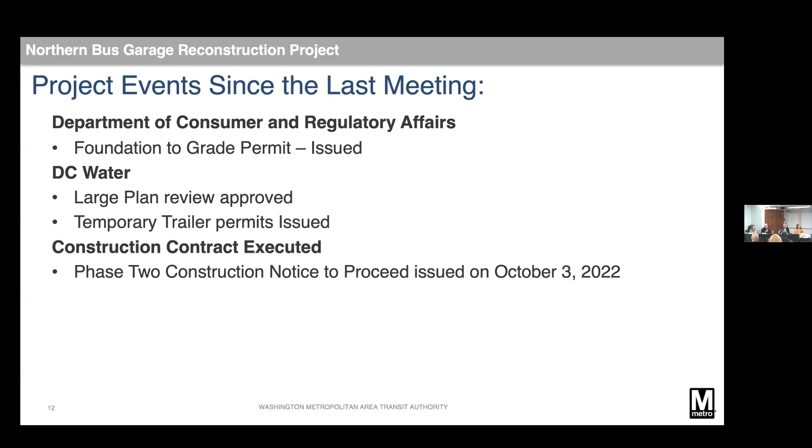Just to give folks a little peek behind the fence, in the third quarter, ahead of the full NTP, we did get an early enabling authorization as well. That allowed us to begin some of the remediation activities.

And then we also began the pre-construction survey program. I'll be diving into that a little bit deeper because I know there's some questions on that after this first construction update.

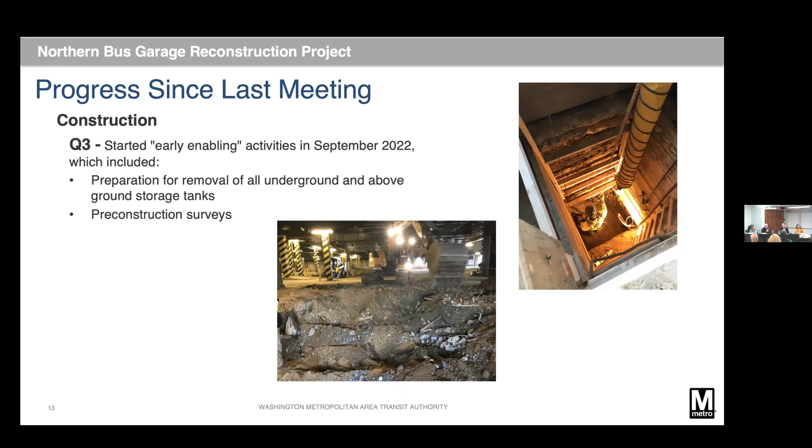The environmental remediation is a condition precedent to us initiating our major demolition activities under our raze permit. So the other things that have happened since then, right up through present day, is all of the underground storage tanks have been cleaned and certified.

6 of the 7 tanks have been physically removed from the ground. At this time, there is one additional one in the basement that we can't remove until we do some of the mass demolition. We have completed all of the purging of all of the lines that serve those tanks back to the dispensary points.

We've taken a lot of the bus maintenance equipment out. WMATA salvaged some of the parts for the vehicle lifts for other facilities for spares. And we have other equipment that we've been demobilizing.

All of the above ground storage tanks that were in the building have also been removed at this point. And the field work associated with the Department of Energy and Environment, DOEE, for the supplemental site assessment has been completed, and Jim will be presenting further information on that later this evening.

The couple of pictures you're seeing, again in the top right, is more of the work associated with the underground storage tank, and the large excavation in the bottom right-hand picture there.

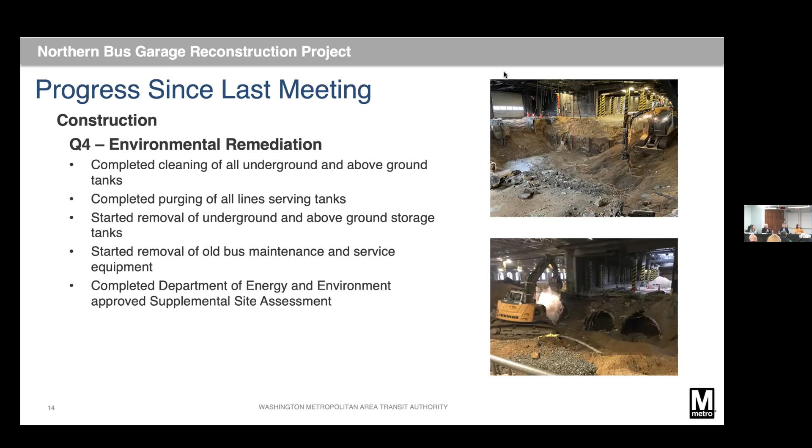The other major activity that's more forward-facing, because it's outside the building, is our mobilization - all of the maintenance of traffic around the site perimeter, the long-term construction fencing, and the art and graphic fabric wrap that you've seen.

The complex has been in the process of being set up and built out on Arkansas Avenue. Our temporary electric power interconnect with Pepco is underway. The water and sewer connections are moving forward through construction permitting, and we will have a soft move into the trailers next week with full occupancy the following week.

This will allow us to take the major step of fully disconnecting all utilities serving the existing building as we move in. The street tree removal permitted by urban forestry was completed, and we've been trying to get moved and set up and out of the building we've been working from so we can advance into demolition.

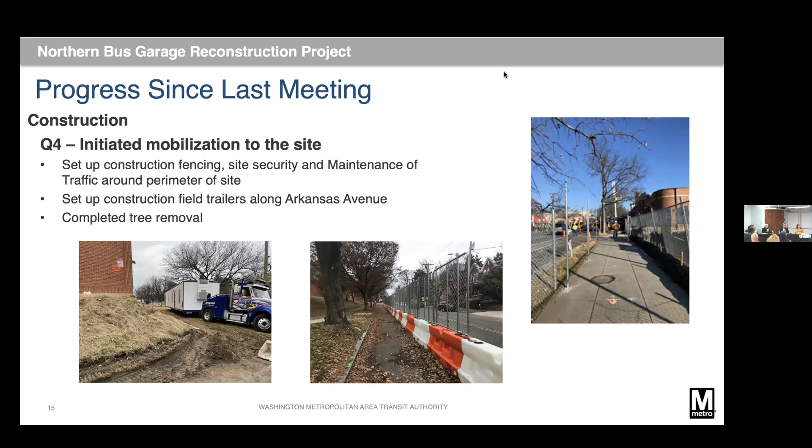As the fourth quarter wrapped up and we moved into January, we put in other instrumentation equipment, including noise and vibration monitoring. We're starting to put up some of the physical monitoring for prisms, and we're working on permitting for the devices we'll need as we initiate major excavation. We have some other monitoring devices that are part of that program.

The installation of foundations has been ongoing along 14th Street for the facade bracing system that will go up for the portions of the facade being preserved. We've also begun preparation for the start of major demolition, which actually began on Tuesday on the cover over Decatur Street, working down toward Iowa, then moving to the south side parking deck and working ourselves into the middle of the site.

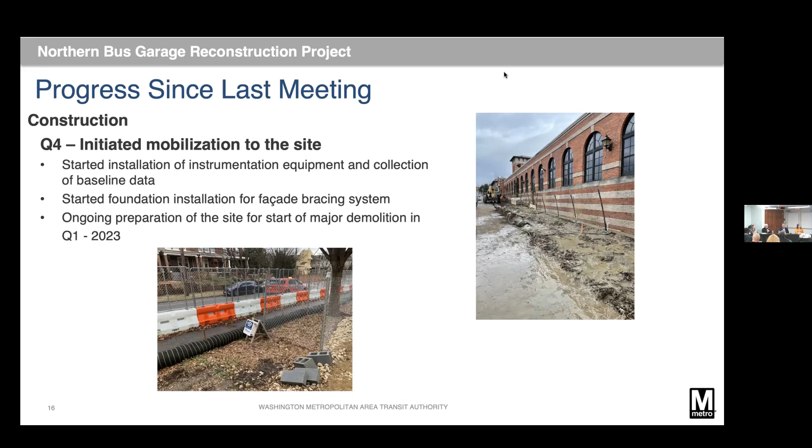As we move into this first quarter, the last of those underground tanks will come out. All remaining service equipment in the building will continue, and pre-construction surveys will continue as our neighbors ask for them. Instrumentation and baseline data will remain ongoing. The historic tower re-support - we're drilling the foundations for that inside, and we'll be moving forward with other elements to complete that full re-support activity in the first quarter.

The facade brace will start going up in February and that'll be ongoing for several months. It's a very complex brace. And again, the major demolition has already started as we finish the first full month of the quarter.

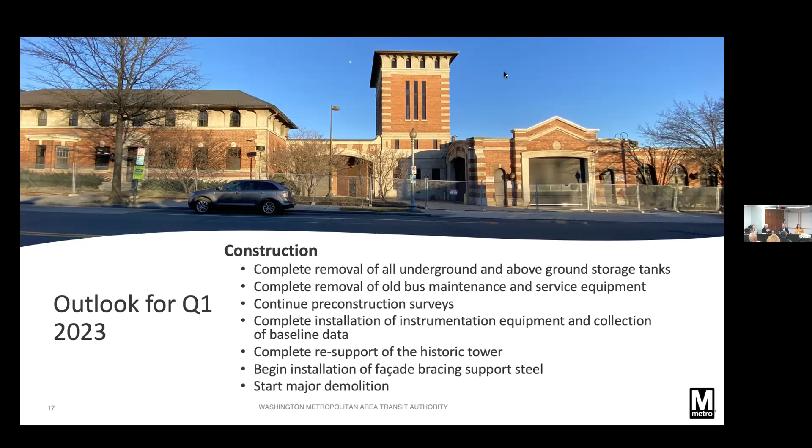I think that brings us up to a question break. Nope, sorry - other agency coordination.

Our building permit is under review. As I noted earlier, the foundation-to-grade permit has been approved. Washington Gas is continuing engineering for the main low-pressure gas service that will provide source fuel for the boiler plant, the power plant for the boilers for the heating and cooling system. DDOT - there was an MOU relative to traffic signal logistics we have to coordinate with DDOT on 14th Street.

That MOU is fully executed now. I noted both of the DC Water items, and our temporary service application for our Arkansas trailers is approved with PEPCO. The ongoing coordination on the finalized new building service application - the last administrative piece of paperwork on that was delivered to PEPCO recently, and we expect the will serve letter coming forward. With DOEE, all of our erosion and sedimentation control measures are approved, installed, and inspected, and our stormwater management plans are, we hope, at the last of the effort of moving through.

We're also finalizing the supplemental site assessment reports and remediation. Jim will speak to those a little further in this evening's presentation.

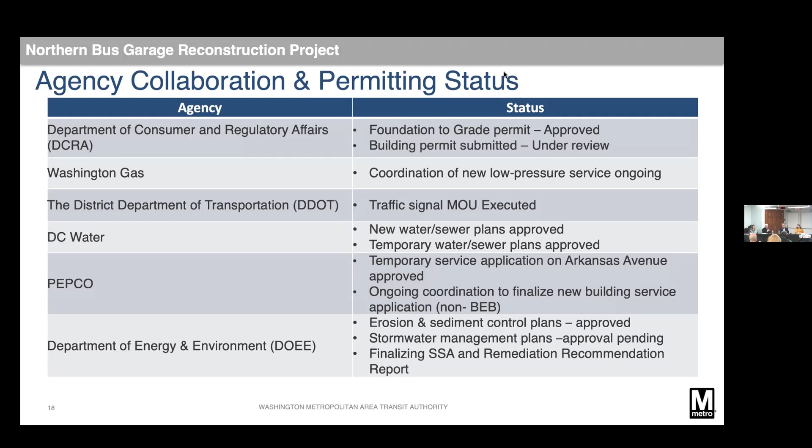Russ, at the last meeting, had asked for a deeper dive on the stormwater systems. I've broken those into two categories - the first is temporary. It starts with those erosion and sedimentation controls around the site perimeter that you can see today. We're going to have a very robust on-site treatment plant that will be able to treat all of the suspended dirt and silt that gets into water from rain, snow melt, and as we excavate.

It will also have the ability to treat any contaminants found in the form of residuals from the investigation, largely in the form of what's called diesel range organics. Those go through a carbon filter so that we meet the discharge receiving requirements for the combined sewer in the District of Columbia with DC Water. Everything will go to DC Water sewer, so nothing will discharge from our site to surface waters. We know we're close to Rock Creek, but the way the stormwater system works in the neighborhood, everything goes to the combined sewer system here.

We have three major sources for our temporary water management. We have dewatering wells that we'll be installing on the upslope side. We also have what's called sumping, which are pumps and pits that we do within the excavation to take care of groundwater, rainwater, or snowmelt. Then the precipitation that falls is managed and discharged to the sewer.

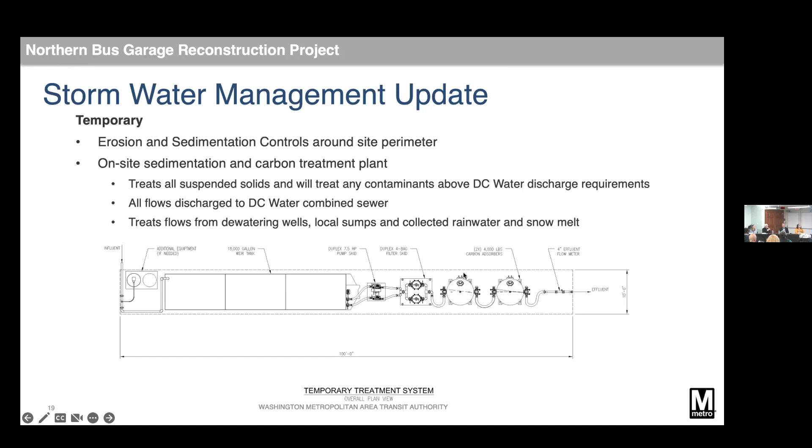That's our temporary world. Our permanent world, on the next slide, is the main stormwater system, which consists of a large underground cistern within the building footprint. It has a 310,000 gallon capacity and captures all of the rainwater that falls on the roofs and the parking of the building, including employee parking.

On our rooftop, we have a recirculation tank with a 60,000 gallon capacity that will draw water first from the cistern and second from potable water from the city. That will be recirculated and managed to take care of all the bus washing activities on the site.

Around the perimeter, we have a series of what's called, in stormwater vernacular, BMPs, or best management practices. These are certain plantable soils with our tree wells, permeable soils under the sidewalks, and permeable pavement on some of our sidewalks around the perimeter to maximize on-site capture.

Those who live in the neighborhood are certainly familiar with it. We're out to lot lines, so there aren't going to be any new stormwater ponds or larger features on the site because of the site logistics restrictions.

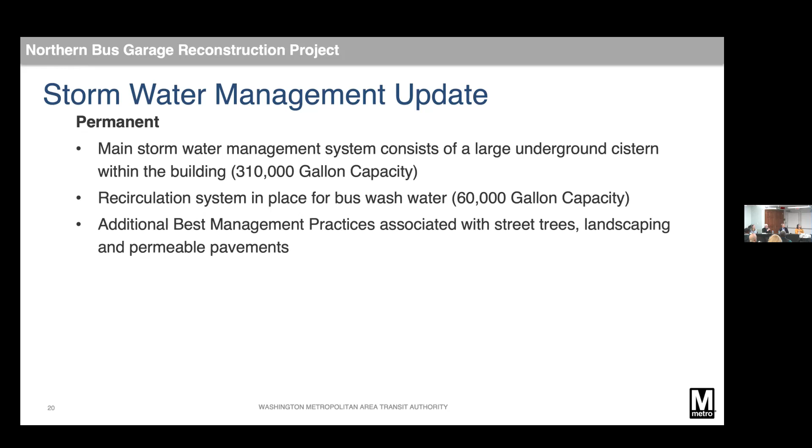We also have a green roof on a portion of the building, about 8,000 or 9,000 square feet, which is another feature that's part of our LEED certification. Next slide, we are to questions.

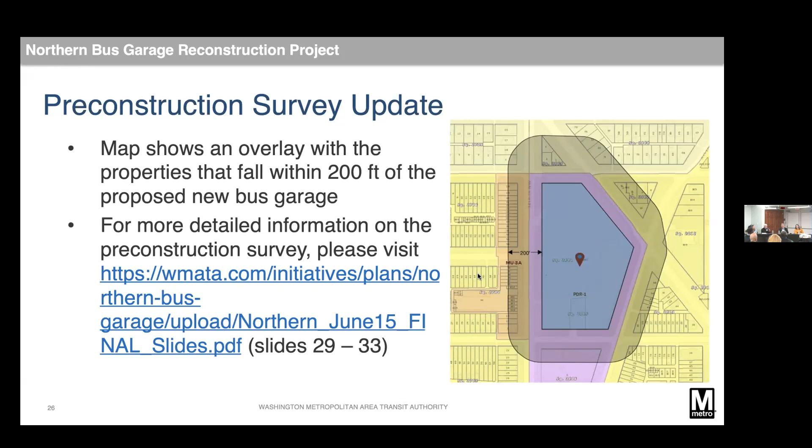Hold on, just so they can hear also. I've sent two emails, and I'm directly across the street, and I've called, and no one responded at all. Because there was one landlord that had like 7 of the properties across the street, and we did all of them through the landlord.

So are you the building owner, or are you a lessee? If you can give me your contact information, I will take it back to the project team and have someone call you tomorrow. And for those online, Emma will post an email in the chat. I want to pause because I'm actually talking to the people online - so anyone online who also hasn't been able to connect with the project team, please email in the chat so that we can relay it.

Your question. Sorry, okay, I think you have to use the mic. I think that's the key.

I commute through Arkansas Avenue every morning and every evening, and the fences they've put up on the back of the building by the construction trailers take up the full parking lane. I understand why you don't want cars to park up along the bus barn side of Arkansas, but if they could move that fencing back just 3 feet - what's happened is it's really narrowed the roadway a lot, and I notice a backup, especially in the morning commute, that goes all the way down to 14th Street because the roadway has narrowed considerably.

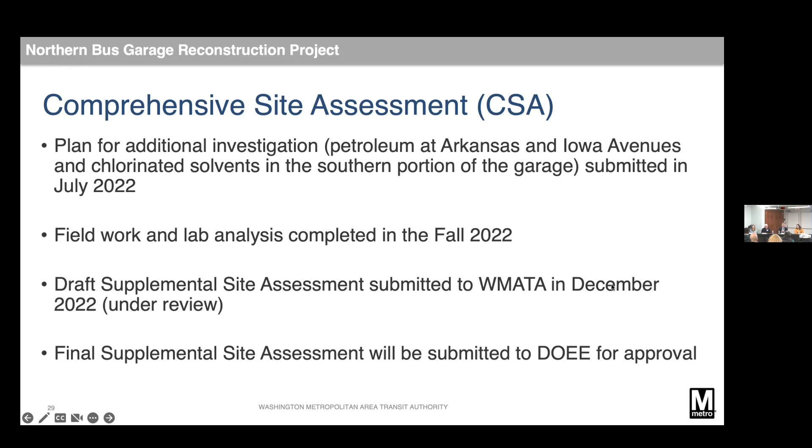We've said all along that there are a number of remediation plan elements associated with this task. Phil has already talked about removal of the underground structures and storage vessels—that action is in progress. Petroleum-impacted soil will be excavated and disposed off-site, at what are called Tier 1 RBCA levels associated with DOEE's program standards.

We know there are some areas already identified for excavation. As we go in and remove the foundation, if we identify other contaminated areas, those too will be removed and disposed off-site. Any free phase liquid and petroleum liquids present on site will be removed and taken to a facility licensed to treat those liquids. Any dense non-aqueous liquids—the chlorinated solvents we've found in trace amounts but not in free product—if identified, will also be removed from the site.

My first read of the draft report is that we did not identify any dense non-aqueous phase liquids. That's good news, but I'm waiting until I get the final report, which will be released once DOEE gives us the signal.

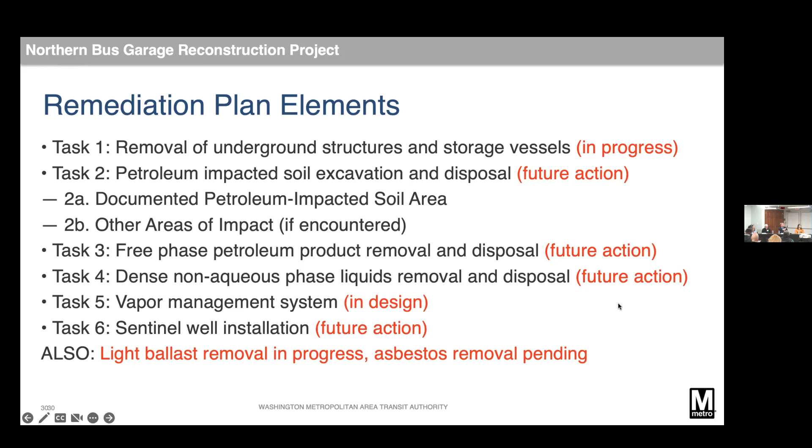So one question that we have - tonight's earlier slides summarize '22 and Q1 '23 activity. The website indicates...

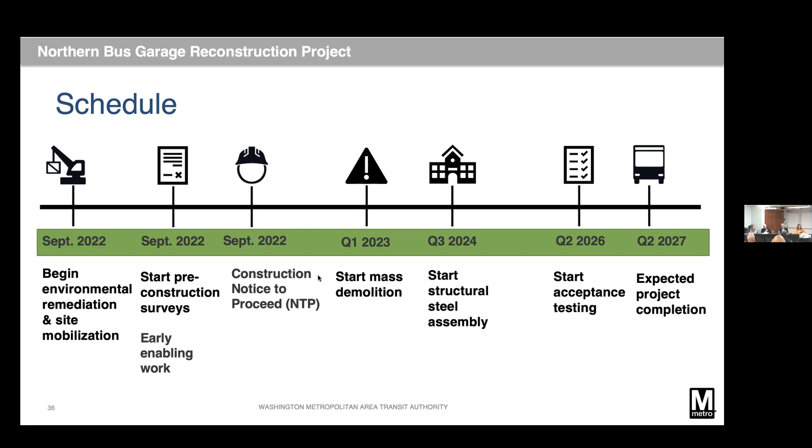We are committed to continuing these community engagement meetings. You will get notification for the next meeting in spring 2023. Here's a list of the website, where you made comments, and we noted the comments and will definitely address those. We also have a dedicated email address, and you can follow various social media avenues.

That concludes the presentation. Are there any final questions online? And then I'm going to come around to the other side of the room.

Oh, yeah. One of the questions — and I guess this is — what happened to the art and transit people? Oh, okay, all right, I do have a couple of questions about that and a comment.

The banners that they put up — my understanding was, and this was responded to at the last meeting, that the art and transit was to extend the length of 14th Street. They put up a couple of panels, then put up a couple more, then the wind took them down, and they laid there for a couple of days. Last I looked or remember, now they're gone. I don't know what the plan is for that.